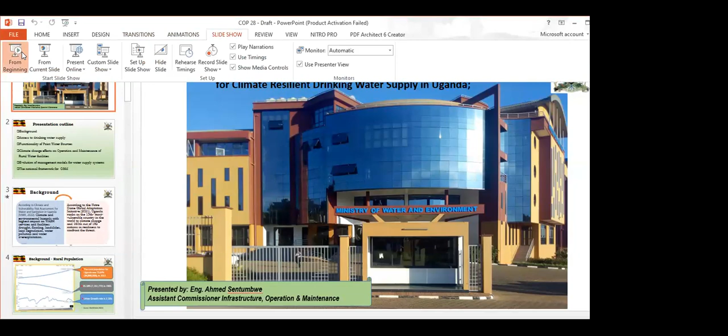Justin, are you in position to see the presentation? I am, but I think it's from a different presentation, not the right one.

But we can see your screen, so that's good.

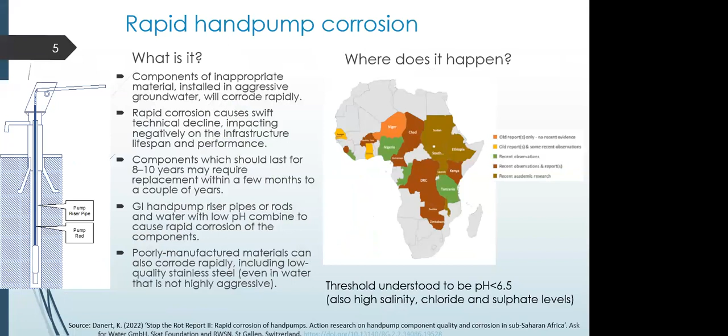Next slide please. So rapid hand pump corrosion - let me define it before we go into details.

Basically, when components of an inappropriate material are installed in aggressive groundwater, they corrode rapidly. This rapid corrosion causes a fast technical decline and negatively impacts the infrastructure lifespan and performance of hand pumps. Components that should last 8 to 10 years may need replacement within a few months or a couple of years - riser pipes and pump rods in particular. GI, galvanized iron hand pump riser pipes and rods, clearly marked in the picture on the left, when installed in water with low pH, combine to cause this rapid corrosion and the red water and rusting that takes place.

Poorly manufactured materials can also corrode rapidly - even stainless steel can corrode quickly if it's low quality, whether installed in aggressive water or not. In a recent study, we found this happens in at least 20 African countries, shown on the map. It's not just pH that causes corrosion, but also high salinity, chloride, and sulfate levels.

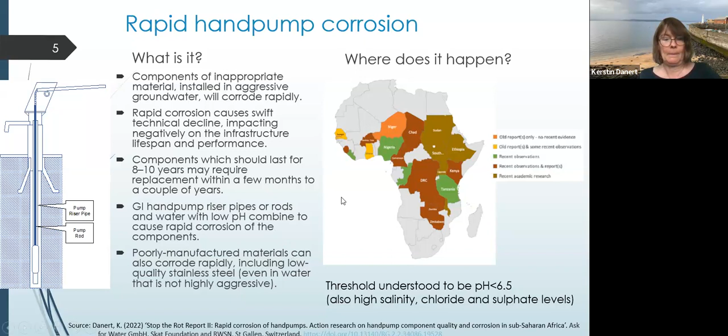Next slide please. This rapid hand pump corrosion problem has been known about for over 30 years.

Yet simple mistakes are happening again and again, repeated in several countries. Galvanized iron pumps and riser pipes continue to be installed in aggressive water. Pump materials are not always meeting quality standards and are not always checked. Pump manufacturers and installers are not always incentivized to deliver good quality hand pump components. So it's a problem for many years, but it also has solutions.

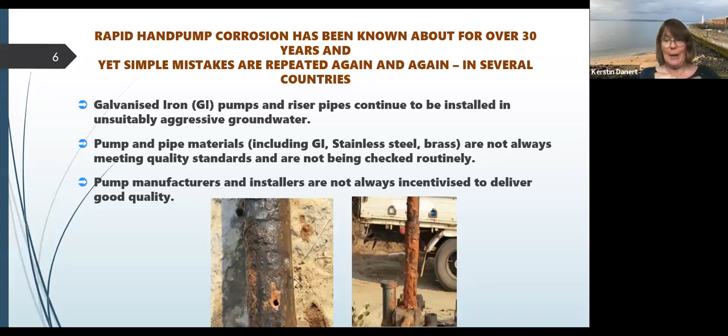With that, I'm going to hand over to Robert. Next slide please.

Thank you so much, Kerstin, and all the colleagues in attendance. It's nice sharing this experience, looking at the Ugandan context and the actions we have taken as a country. Of course, these actions don't give us a one-stop solution, but it's supposed to be a combination of several actions that can help solve the problem. Next slide please.

So if we look at the information that Kerstin has been sharing, it was more on a continental scale. But in Uganda, as the ministry responsible for water and environment, we have taken some actions to try to solve the problem. The challenge with this action is that it is more of a blanket action.

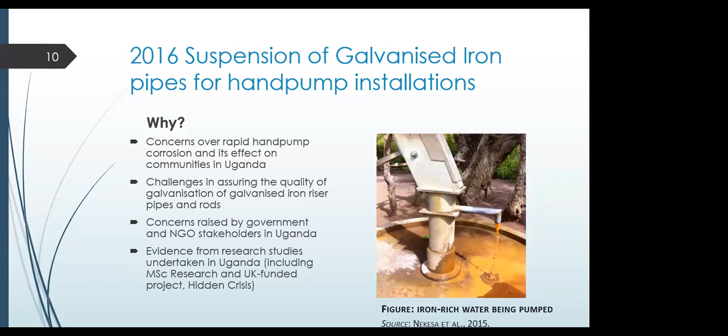But we had strong reasons for this decision, because it was evidence-backed. We had several research studies taken within the country, locally from our institutions of academia, and also external persons who came in to do the research. So it was quite revealing. The evidence was there, and then an action had to be taken.

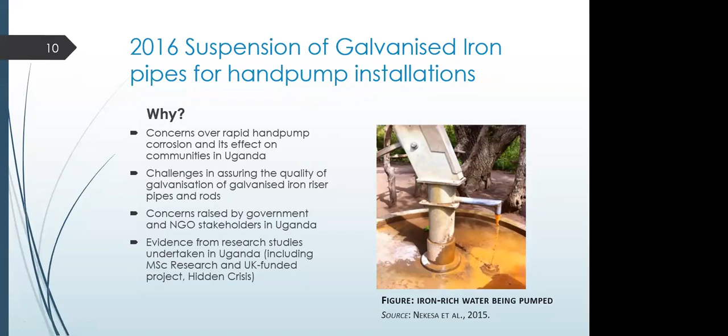So in 2016, our Director of Water Resources Development issued a letter that was circulated to all persons involved in the development of water within the country. We do this through a decentralized form of governance, where respective local governments implement the development of shallow wells and deep wells. So this information was provided to them.

We also have a body that encompasses all NGOs dealing in water supply and sanitation, called UWASNet. So we sent this communication to UWASNet as well, and then the suppliers also got to know about this.

Through dialogue, we held several meetings, but there was one particular one held in the north of the country where we came together and provided additional information. I think the challenge earlier on was that we didn't do a lot of stakeholder engagement, and didn't take steps to inform the providers, consumers, or users of the decision. So we had a little resistance, but after several engagements following the decision, everyone came to accept it was the right move.

So the initial challenges came in, of course, getting to know the quality of the stainless steel. Was it 304 or 202? These challenges came in, and we're still having them as of now. But I can say since 2016 to date,

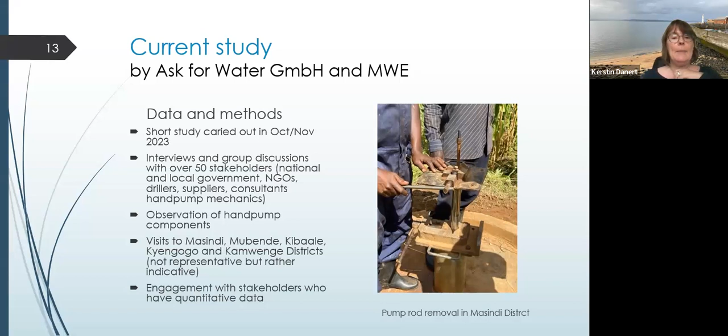So what are the key findings of the status today? Well, as Robert has said, the change of materials as a result of the suspension is largely appreciated by implementers as contributing to the prevention of rapid corrosion. So it's made a difference.

So really well done for taking this affirmative action. However, some stakeholders still install GI pipes and or GI rods. There are still quality assurance challenges, including recognizing stainless steel grades or inferior products. There are also cost implications. Stainless steel is more expensive. Even the alternative, PVC with stainless steel collars, is also more expensive.

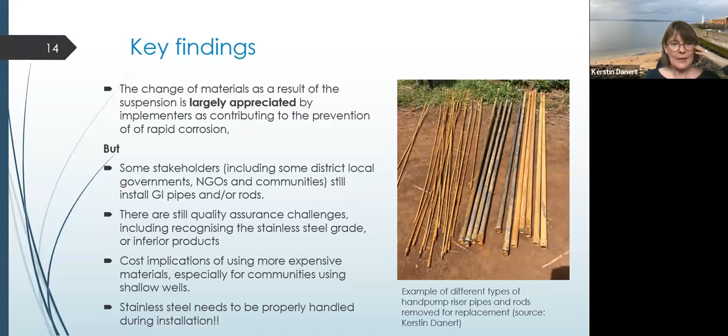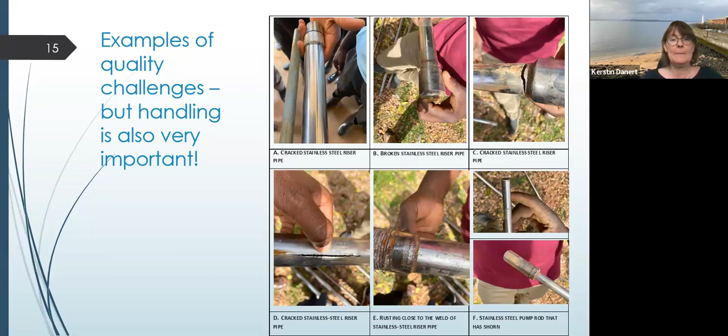Here's some pictures, examples of quality challenges, showing that handling is also very important. These are cases we looked at in Mubende district, where the stainless steel had cracked just under the weld, had cracked laterally, was very thin, and rods had snapped. In our report, we'll also talk about quality issues as well as handling issues, which both contribute to quality. Next slide, please.

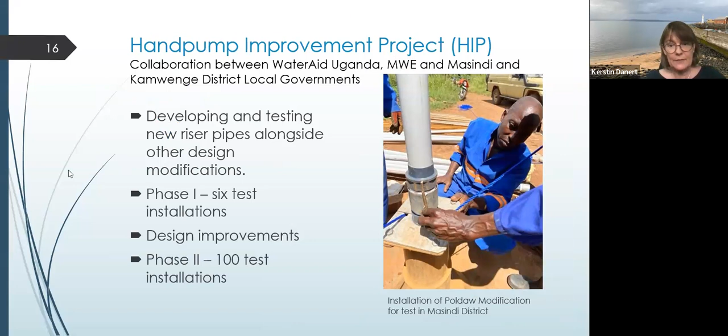Before handing back to Robert, I want to point out a very interesting initiative taking place in Uganda. It's called the Handpump Improvement Project, a collaboration between WaterAid UK, WaterAid Uganda, the Ministry, and Masindi and Kamwenge district local governments. This project is trying to develop and test new riser pipe solutions that shouldn't be any more expensive than the current GI, alongside other interesting design modifications. In phase one, they installed 6 test installations, went back for design improvements, and are now installing 100 to really test. The picture here shows the installation of the Poldaw modification for test in Masindi District.

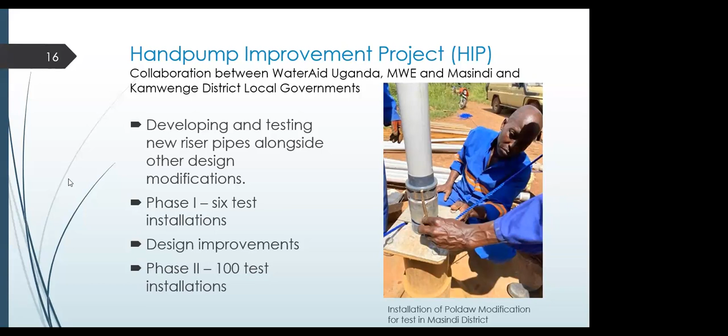So back to you, Robert. Thank you. Next slide, please.

After talking about this nice story and the study that has been going on for about 2+ months within the country, looking at what we have done before, what we're doing, and what the sector is demanding in the time to come, we're coming up with about 5 key areas that we feel as practitioners and professionals in this field we need to think through. Sometimes when we come up with this, it's not that we have all the information, and I'm happy this webinar brings professionals working in various countries and parts of the world who probably face similar challenges. It provides a platform for sharing experiences and coming together for a better solution.

I also saw earlier what Kerstin was talking about, the test where we're now installing 100 wells and we're going to be monitoring these closely. I remember seeing earlier in the chat where Paul was talking about designing heavy-duty PVC riser pipes, which are U2 or U3, I believe the same initiative. This is something we could also be much interested in as a sector. But it's important to raise awareness and improve the knowledge, because without knowledge of experiences - if we can document the experiences we've gone through to other partners in other parts of the world, it will probably save them a lot of resources so they don't go through the same mistakes we've gone through.

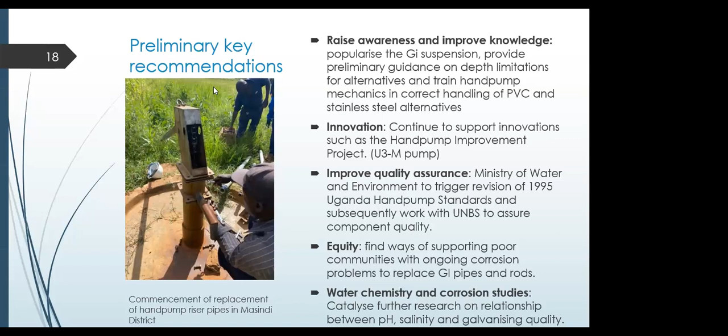For example, the water and environment sector is supposed to have an independent team of persons that occasionally meet and look at the challenges the nation is having in terms of quality of materials for construction of water supply systems. Unfortunately, as you can see, some of these committees last met maybe over 20 years ago.

So there is even a lag within the respective government agencies that should be addressing these challenges. If there is a shortfall at that level, you can imagine the challenge at the consumer level. So the quality aspect of materials used should span across very many stakeholders, not just government, but even up to the last user.

Now, in terms of equity, it is important to find ways of supporting poor communities. I think Kerstin did mention earlier that these materials being proposed are quite costly. I believe currently in the country, the cost of one stainless steel pipe and one stainless steel rod is close to $100.

Now, if we're going to have 10 or 15 pipes installed in a hand pump, you're talking of a lot of resources required. If you go back to the previous statistics of having 63,000 water points, and we choose to have all these overhauled, that is how much it would cost the country. And I don't think we have those resources.

I believe the challenge we have in Uganda is also in other countries. But I think one of the greatest mistakes, and I want to admit this as maybe one from the side of policy, was issuing the blanket decision to stop the use of galvanized iron, because this should be backed by scientific facts.

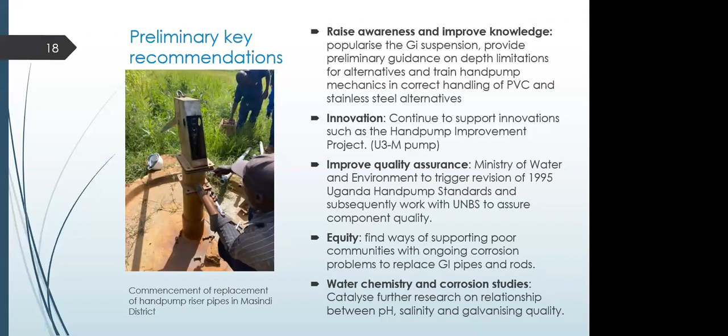We understand that corrosion is actually driven by several factors, the key being the pH, and of course the cations and anions present. When you do the chemistry and look at the corrosion indices, they give you a lot of information on how you can play with the water chemistry and assess whether the water is very aggressive, mildly aggressive, or not aggressive at all.

Through my work within the country, I have come across areas where I would never expect corrosion to occur. From literature, it is stated that if you find pipes from groundwater covered with some white powdery slurry material, it is actually a deposition of carbonates. So what is happening here is the opposite of corrosion. The ions are coming from the water and being deposited on the walls of the pipe, thereby protecting the pipe. So you wouldn't expect corrosion to occur in such places.

So I think that as a long-term recommendation, it is very important that a better quality regulation is undertaken.

Inasmuch as the decision that was made was to do a bit of firefighting and fix the problem, it's now very important that as a nation, as a country, we come back and look at the decision that was made. I think it's important that we precisely identify and localize the problem of corrosion, because not all parts of the country are having that problem.

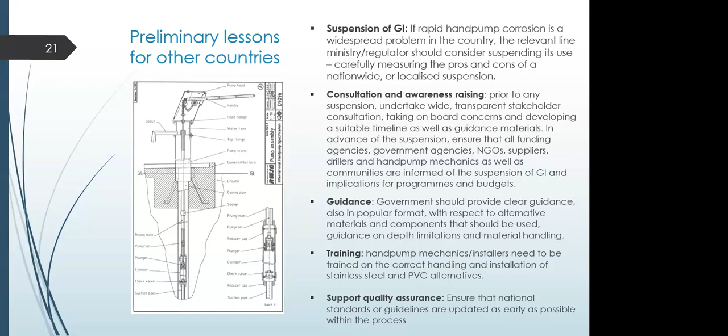Then, in terms of guidance, government should provide clear guidance, also in popular format, with respect to alternative materials and components, and guidance on depth limitations and handling.

And that brings me to the next point of training: pump mechanics and installers need to be properly trained on the correct handling and installation of alternatives such as stainless steel and PVC, or even looking forward to what may hopefully come out of the hand pump improvement project.

And also quality assurance: ensure that national standards and guidelines are updated as early as possible, to ensure that standards bureaus can work with the regulator, with the ministry, to ensure quality. Next slide, please.

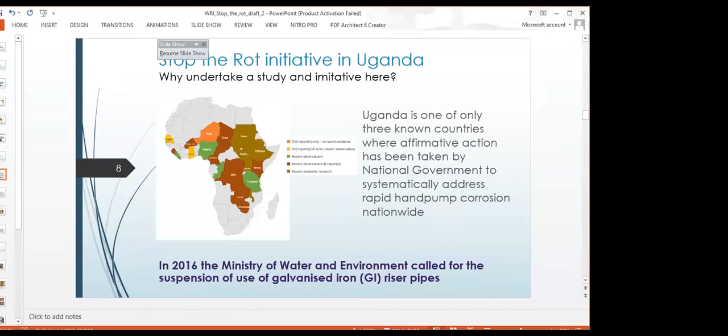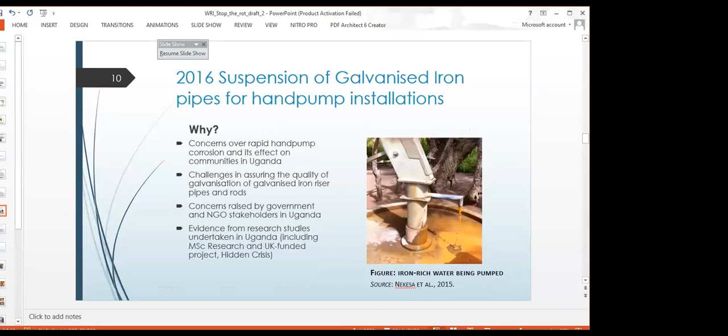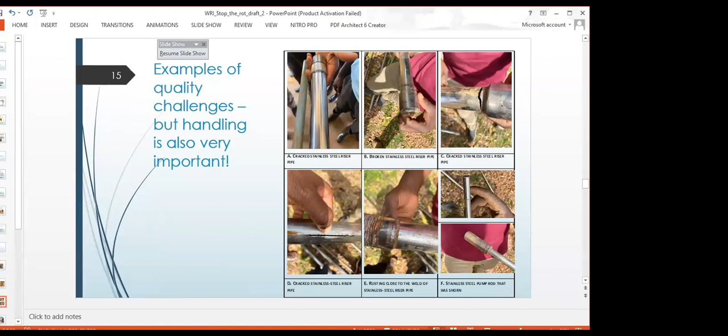Heavy metals, like zinc, lead, manganese, are some of the parameters we now test for, because we realized there could be several existing water points with a lot of heavy metals that had previously passed the test. So the dark scaling question may not necessarily be a result of poor cooking utensils, but could still be associated with the water. If you've been active on social media, you might have seen the report showing contamination within rice in the country. Of course, that could be another debate, health related, but we feel water is probably also a contributor to this, if that was the problem.

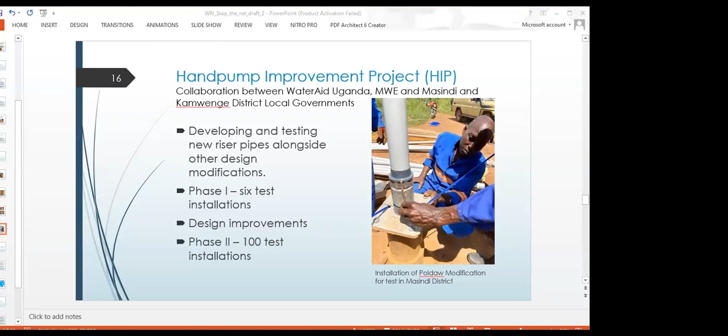We're not so sure of the source of the heavy metals. I know a study was done, but on a different platform we're trying to reassess and look into the quality of the research, especially the source of water used for cooking or growing the rice, and where the rice samples were picked from. We import a lot of rice from Tanzania, so you never know. When we look at this wholesomely, we should be able to advise the nation on the right thing to do. As of now, I don't think we really have problems with cooking utensils, but we shall definitely bring this to the attention of UNBS and look through it.

Thank you. Thanks a lot for that clarification. I'm looking forward to seeing the results of that broader testing.